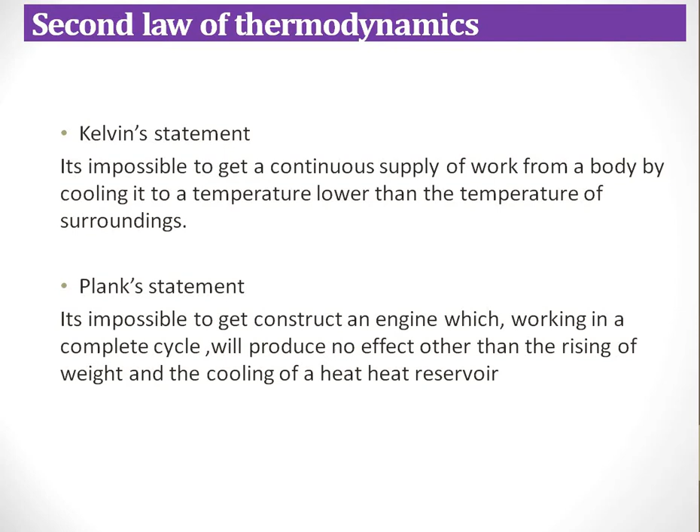Okay, Planck gave another statement. It is impossible to construct an engine which works in a complete cycle and will produce no effect other than raising of weight and cooling of heat reservoir. So this is the statement of Planck. Next statement is Kelvin-Planck's statement. It is impossible to construct an engine which operates in a cycle and has a sole effect of extracting heat from the reservoir and performing an equivalent amount of work.

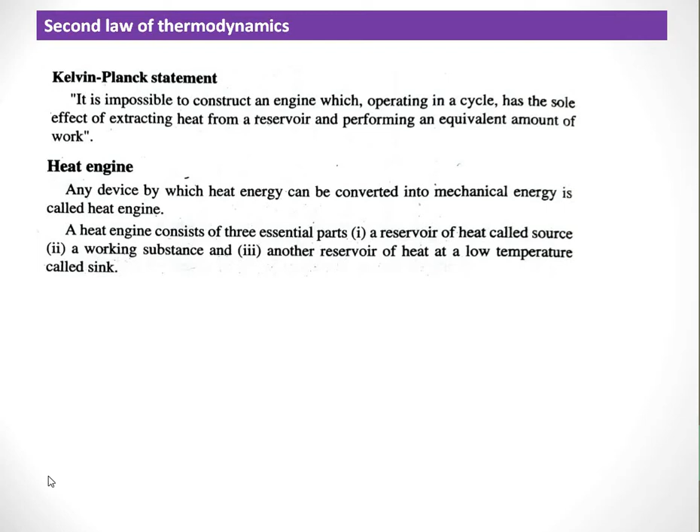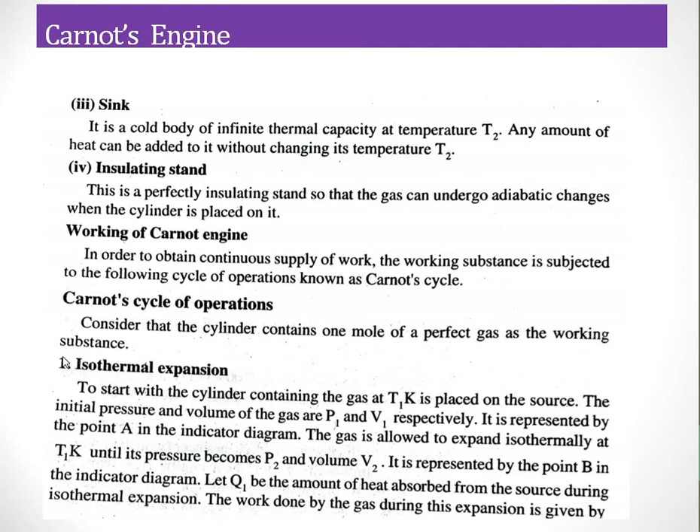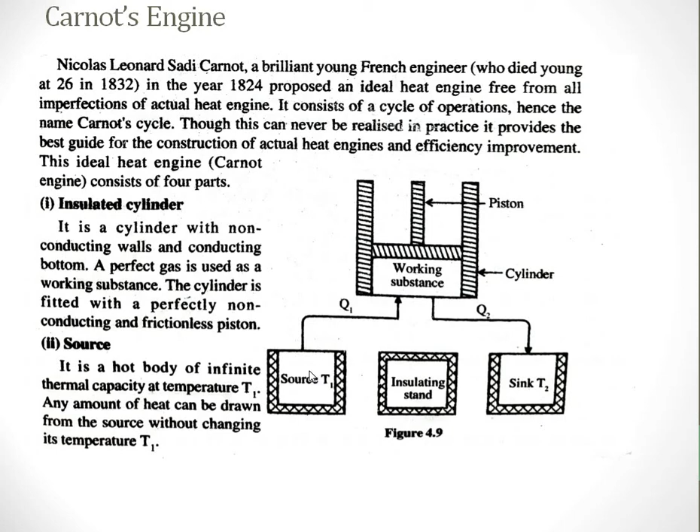Okay. So we already discussed the working of a Carnot engine. Let us find out the expression for work done during a Carnot cycle. So let us examine the work done during the process isothermal expansion, that is the process from A to B. So Q1 is the amount of heat absorbed, that is given by W1 is equal to integral V1 to V2. We already derived the expression of work done for an isothermal process.

So second one is adiabatic expansion. Here the pressure and volume change from P2, V2 to P3, V3. Again its temperature changes from T1 to T2. So the cylinder is now removed from the source and placed on a non-conducting platform until its temperature falls to T2 K. I already discussed it. Let P3 and V3 be the pressure and volume of the gas. So let us find out what is the work done.

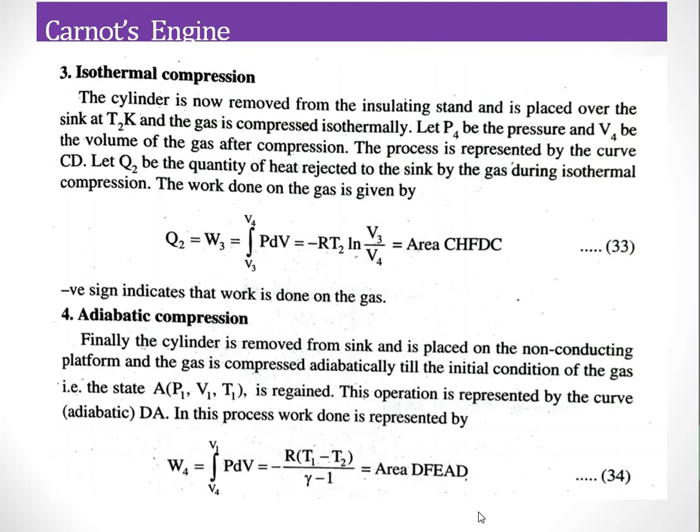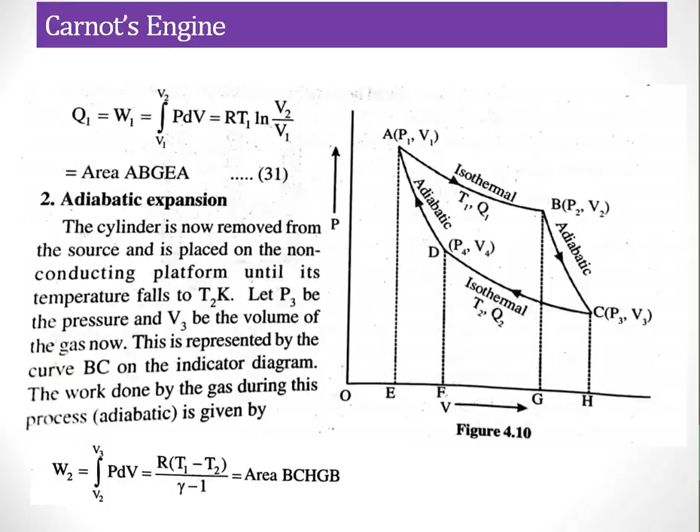So this is the area. Okay, both areas are the same. Or otherwise we can call this DFEAD. Both are same. Okay. Or we can summarize this Carnot cycle as this.

Okay, first, this is the first step, an isothermal expansion. So here this is expanded. Then it's adiabatic expansion. Then here is isothermal compression and this is adiabatic compression, and after that both are same. Okay. So these are the steps of a Carnot cycle.

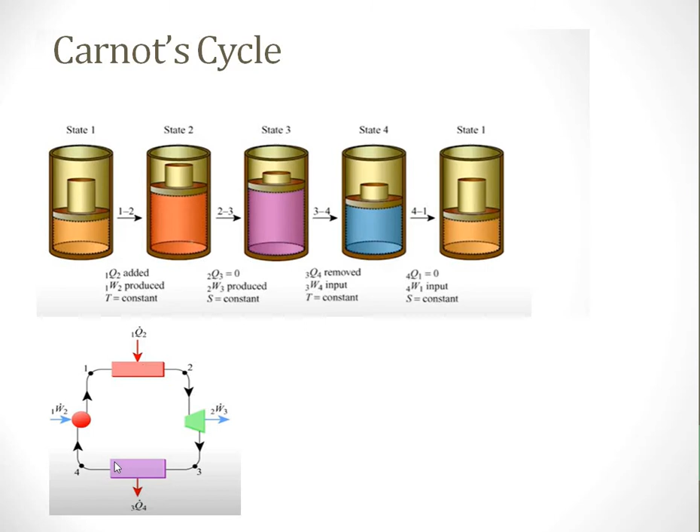Here we can schematically draw the Carnot cycle as this. Q1 amount of heat is absorbed. Here work is done by the system and Q2 amount of heat is rejected, and again the work is done on the system. Again the first state is reached. So this is also one type of diagram to explain the Carnot cycle.

So let us find out the expression for work done by the Carnot engine. Q1 amount of heat is absorbed and Q2 amount of heat is rejected. So the net amount of heat absorbed is Q1 minus Q2. The net work done by the system is given by W1 plus W2 plus W3 plus W4, that is given by W1 plus W3. So these two terms will cancel.

You substitute the expression for work done in this expression and you can find that the work done by the system is given by W1 plus W3. According to the first law of thermodynamics, delta Q is equal to dU plus delta W. That is, delta Q is equal to delta W, because after this process the system will return back to its original position, so there is no change in the internal energy of the system.

We know that the first law is delta Q is equal to dU plus delta W. This is a cyclic process. After the 4 steps, the system returns back to its original position, so its temperature and all things are similar. So for the whole cycle there is no change in internal energy. So dU is equal to 0; during the cyclic process, the change in internal energy is 0.

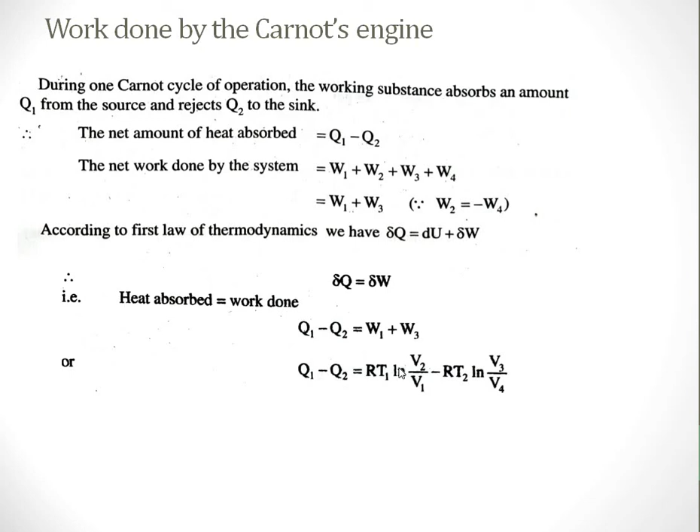So we can write delta Q is equal to delta W. So the heat absorbed is equal to work done. Heat absorbed is Q1 minus Q2 and work done is W1 plus W3. So Q1 minus Q2 is equal to RT1 ln V2 by V1 minus RT2 ln V3 by V4. This is the expression for the net amount of heat absorbed or work done by the system. Okay.

So we know that the net amount of work is Q1 minus Q2, that is equal to RT1 ln V2 by V1 minus RT2 ln V3 by V4. Now, in order to get an expression for work done in terms of temperature, because here we have volume terms V1, V2, V3, V4, we are now going to find out an expression for V1, V2, V3, V4 in terms of T1 and T2.

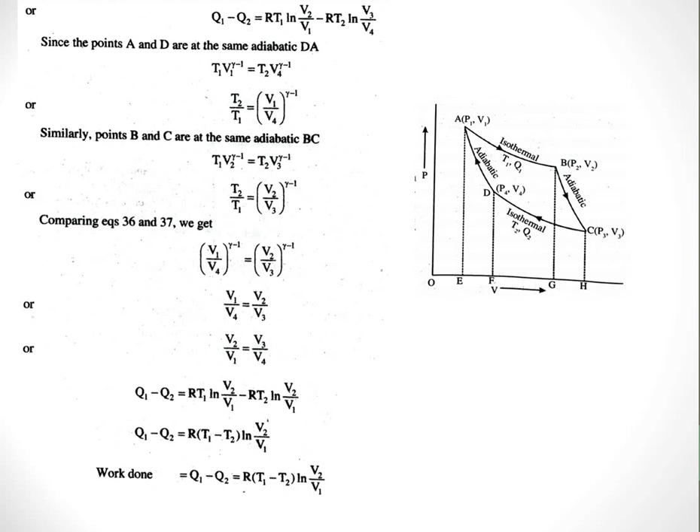We know that Q1 minus Q2 is nothing but R into T1 minus T2 into ln V2 by V1. And we already discussed that Q1 is equal to RT1 ln V2 by V1. So ln V2 by V1 gets cancelled and we get an expression for efficiency in terms of temperature: T1 minus T2 divided by T1. In order to get this, we wrote the equations for two adiabatics and compared them.

So we can write this efficiency equation as eta is equal to 1 minus T2 by T1, that is equal to 1 minus Q2 by Q1. When we divide this by Q1, you will get the expression for efficiency as 1 minus Q2 by Q1. So those are the two expressions for efficiency.